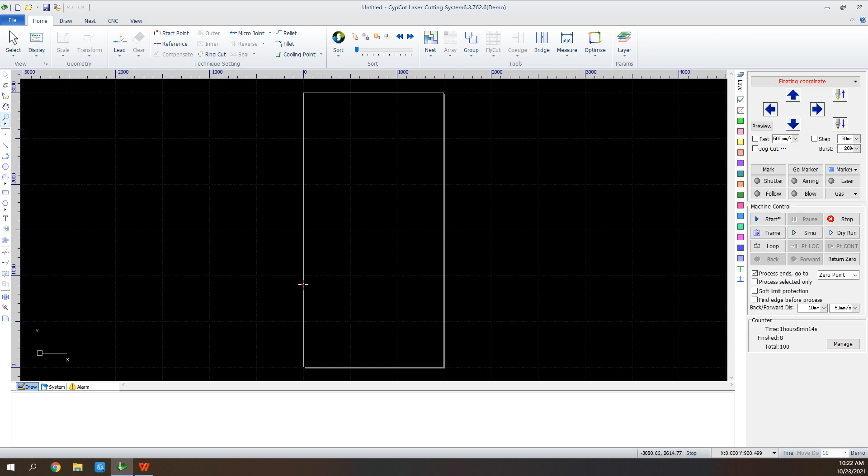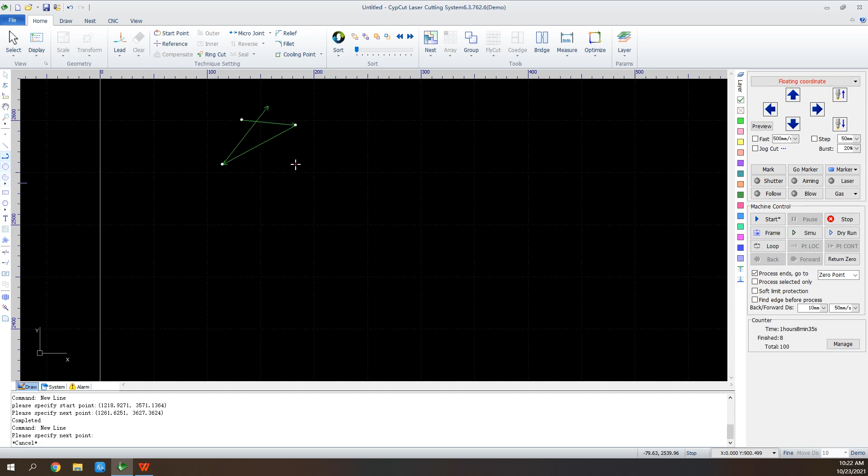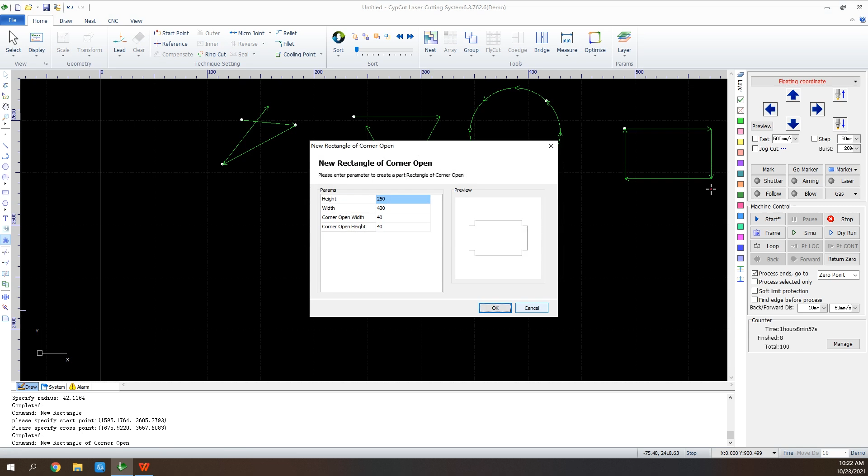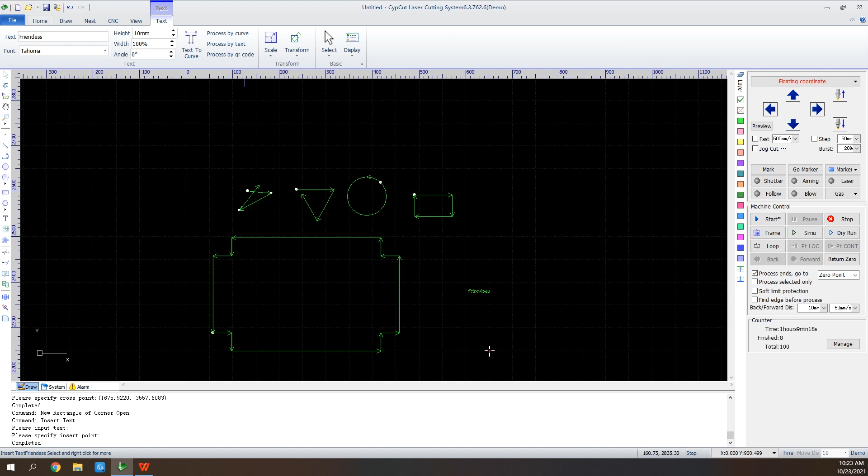We can draw lines, polylines, circles, rectangles, and we also have standard parts. And we can insert text here. If it's too small, we can make it bigger.

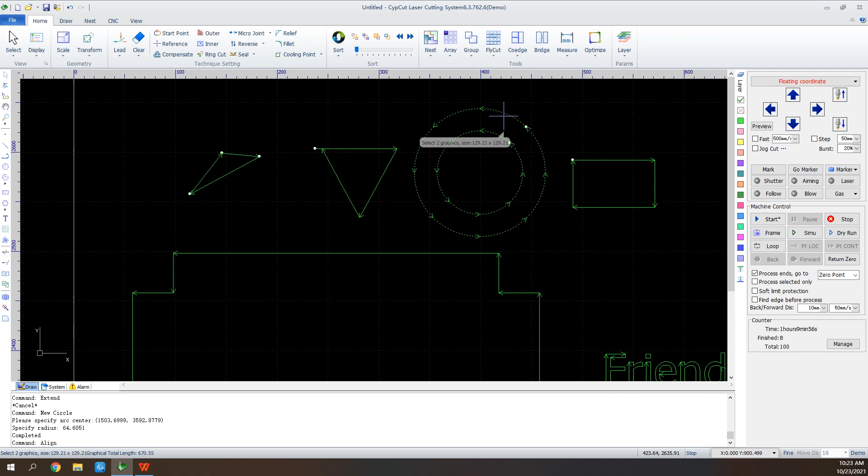And down below, we have trim, extend, and if we have 2 circles like this, we select them and click the center align. They will be center aligned.

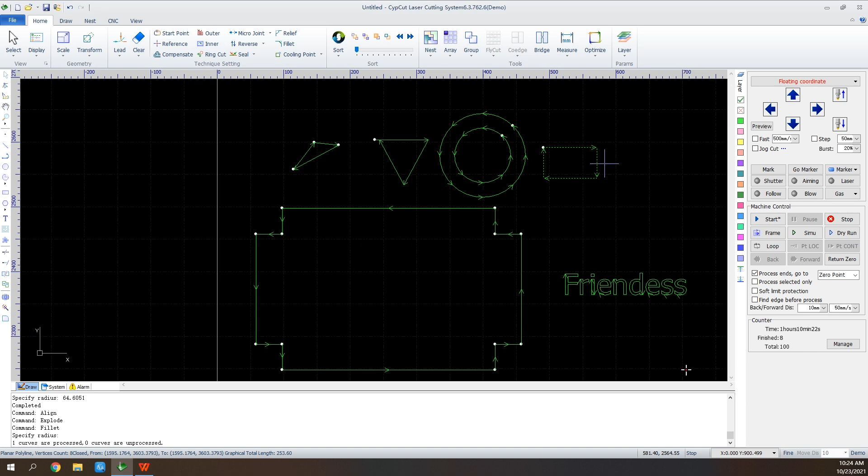When we explode a graphic, it will be turned into several lines. And we also have the fillet. Select the graphic and click the fillet. We will get round corners.

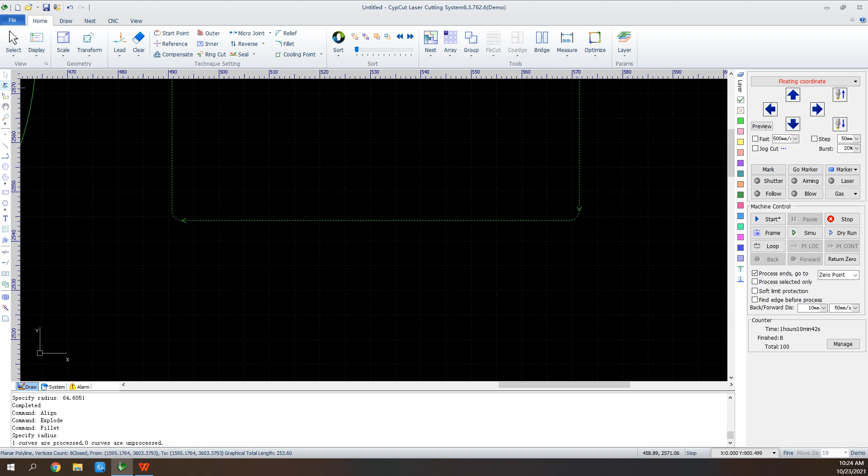The first 5 functions of this toolbar are selection, node editing, sequence editing, dragging, and zooming. Node editing is used for fine-tuning graphics. Select a graphic and click the icon.

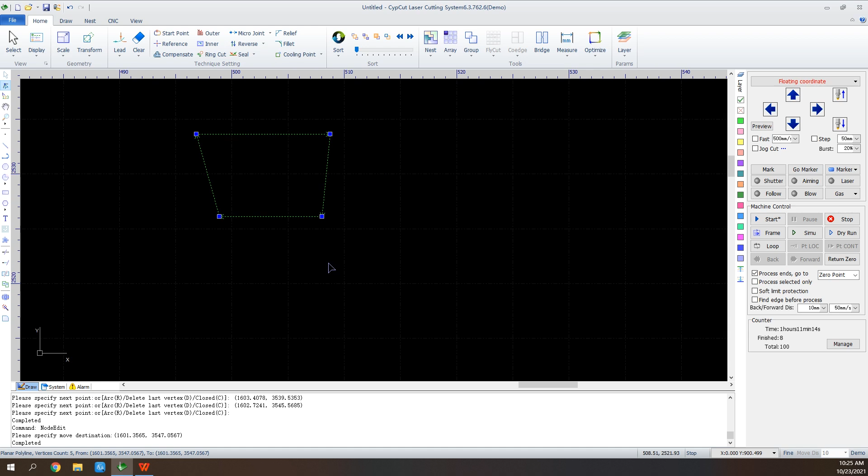For example, let's firstly draw some irregular graphic. Select the graphic, click the icon. We can see the nodes of the graphic. Drag the node to adjust the graphic.

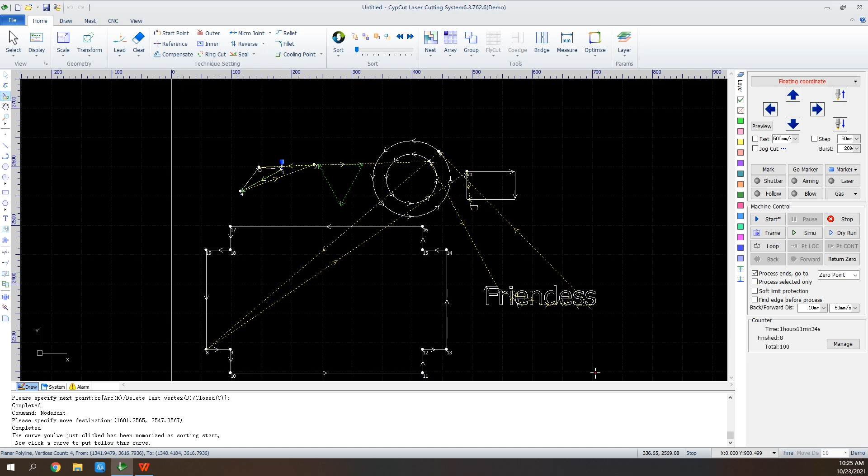And we can edit the cutting sequence manually. If unsatisfied with the default ones, it would be changed following the sequence we click.

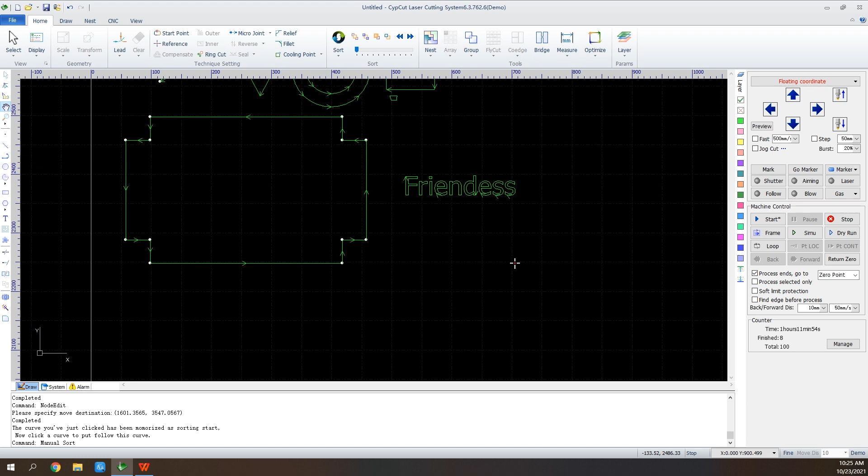As for the last 2, drag to translate the view or zoom in it as we want.

In this View module, click Select to get the drop-down menu. We use Quantity Modify to modify the graphics of the same size and layer. First, select a graphic. Then we click the icon, and we can give instructions in this interface.

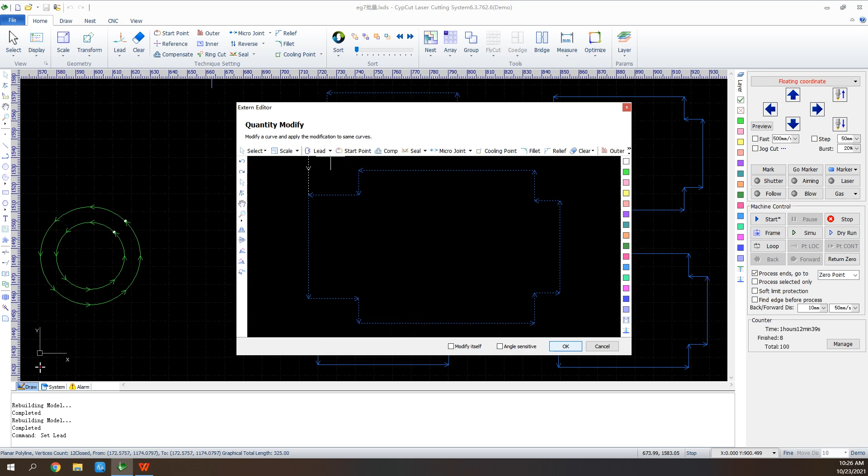For example, we set a lead. Click OK, and we will get 4 leads for each one of the 4 graphics.

There we also have Disable Fast Drag Copy. This is for avoiding misoperation on an input file. Now we cannot drag the graphic.

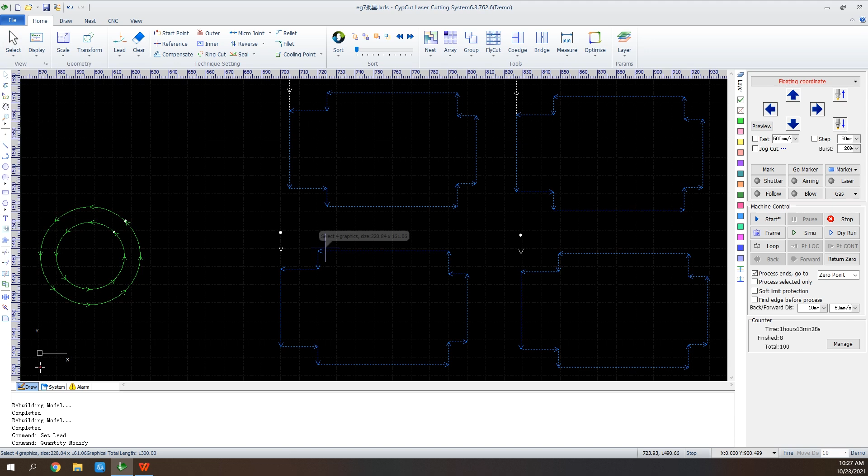Also, we can choose graphics by layers or by types. And we've got 2 ways of frame. Press and hold from left to right, a blue box will appear. Under this condition, only if a whole part was framed in the box will it be selected.

And if hold from right to left, there will be a green box. As long as part of the graphic was framed in the box, the whole will be selected.

And in the drop-down menu of Display, we have Display Open Figure in red. Let's draw an open figure. And we choose this. It will turn red, and we can quickly find it and modify it.

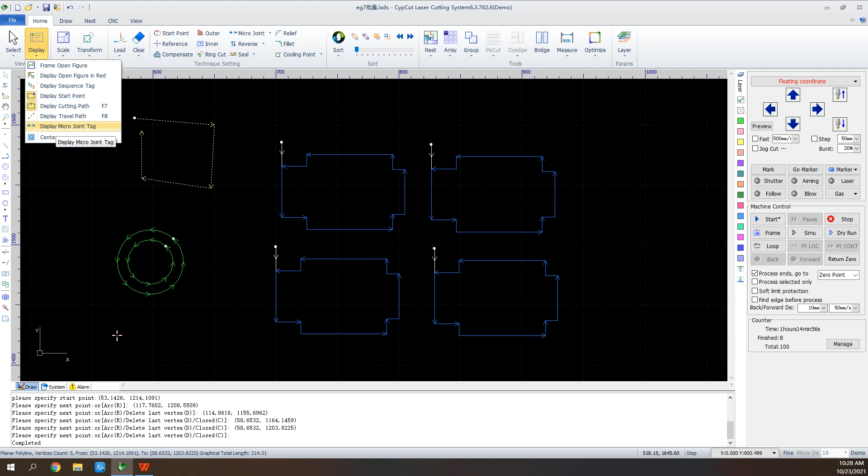And we also have Display Microjoint tag. This is for when there are too many microjoints and we may not remember. We click the function, and we can quickly find all the microjoints.

And let's draw something new. Select the graphic and click the scale to modify size. Now, as we can see, the ratio is locked. We need to get it unlocked first.

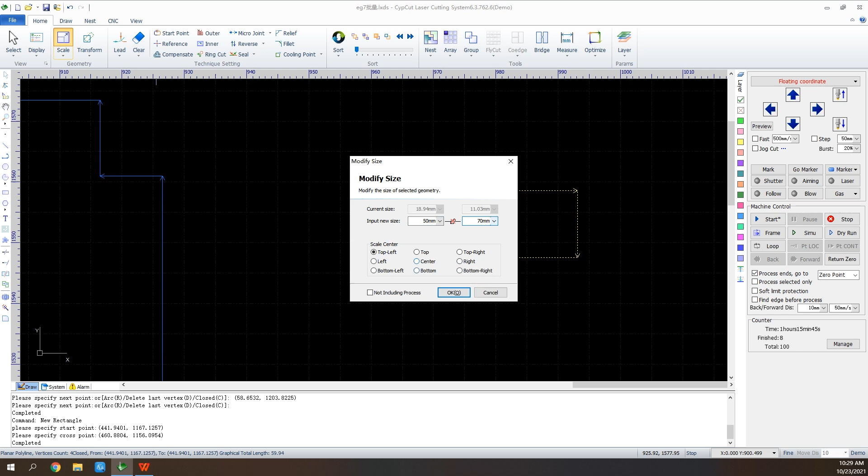Say we want a rectangle of 50 times 70. Input dimension here and we will get a new one. Quick modify the graphic size can be realized as well: 2 times bigger, half times smaller. And we can find ways in transform to translate, align,

flip or rotate the graphic. If we have graphics like this, we firstly select them and make it left align. Flip vertical, or we can rotate it.

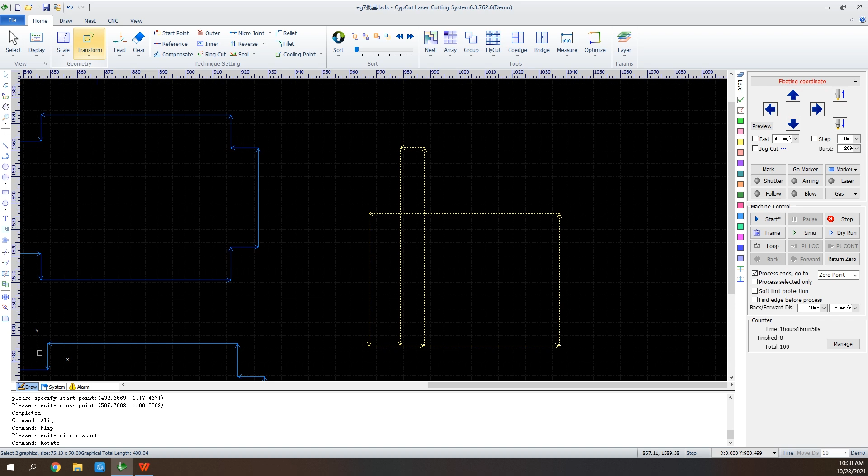And when we laser cut parts, we make the cutting path start from several millimeters away from the part. This way it could get cut much better. The distance is what we call the lead.

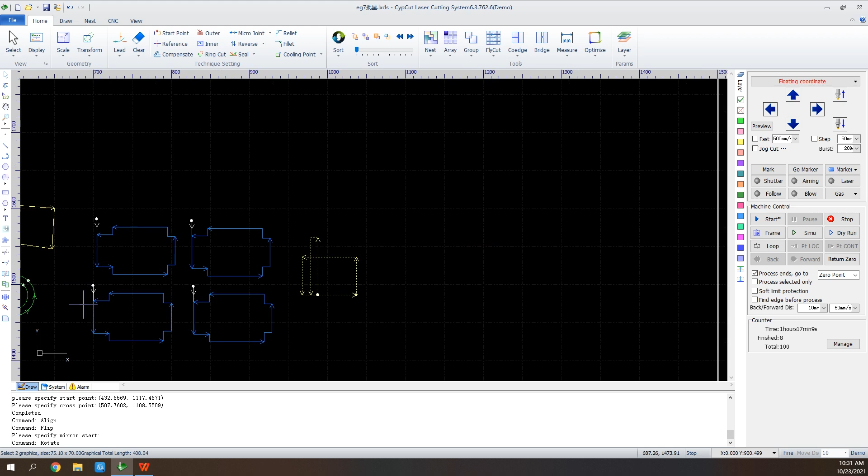When we set a lead, first we select the graphic, then click the lead to set the parameters. 3 lead types to be chosen: line, arc, line plus arc, and here we can set the length and angle.

If we need a small hole to remove slag when we are cutting stainless steel, check this box. As for lead position, we can choose to introduce from part tip or long edge. It's just according to our needs.

Generally, we recommend an angle of 0 degree for lead from part tip, but an angle of 90 for that from long edge to get a best performance. When we need to change lead type but remain the original position, check this box.

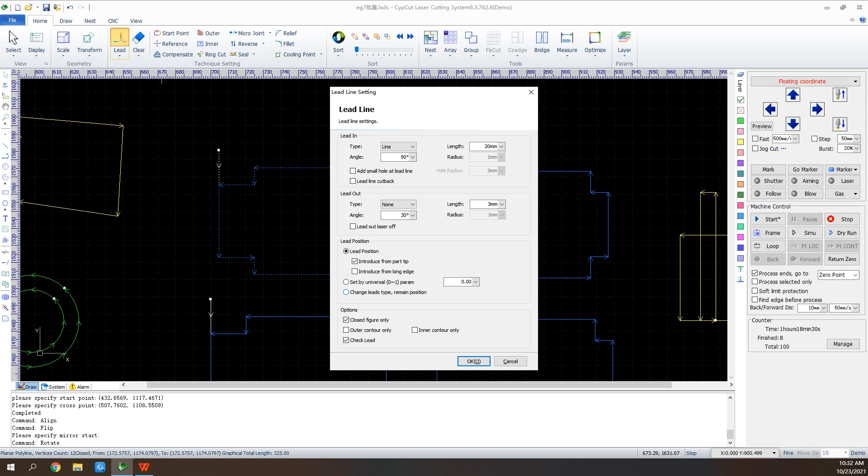And if we don't want a lead, just clear lead to delete it.

And we've also got a bunch of other functions here on the right, the technique setting. First, we have start point. When we feel like changing the start point that automatically generated, just click the icon. Then a small square will appear as the cursor moves on to the graphic, and we can change the position to wherever we want.

As for laser cutting, there exists a kerf width. We can use the compensation.

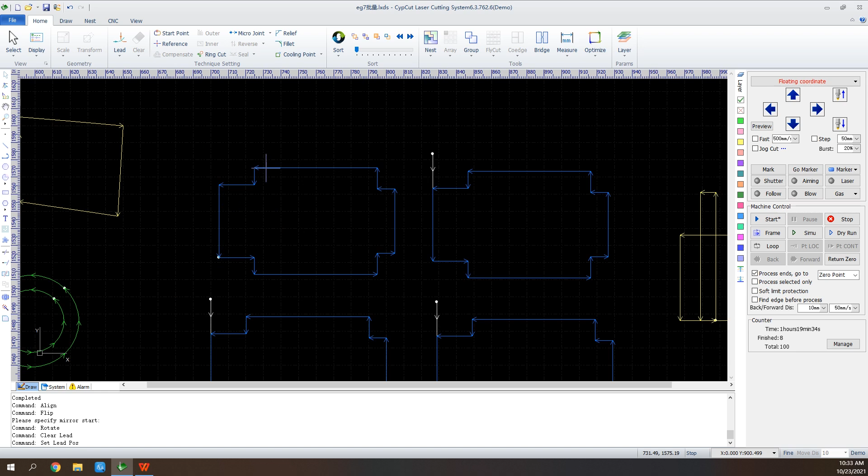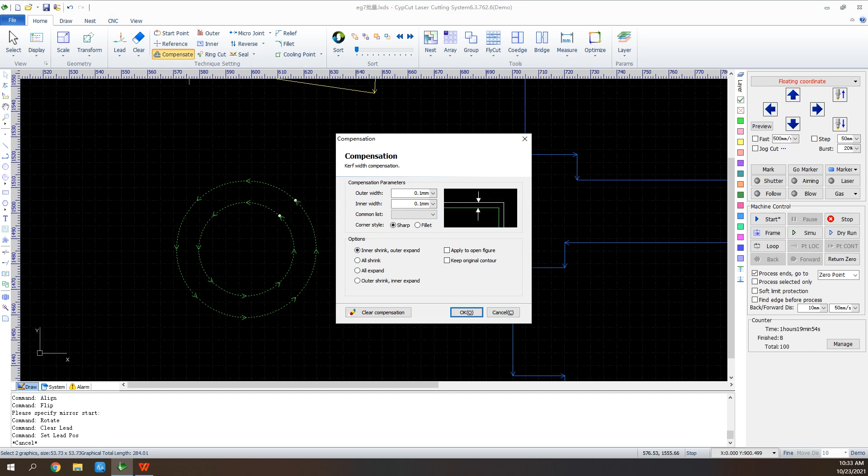And if it's a graphic like a ring, we check inner shrink and outer expand to make up for it. In this case, we can get parts cut more precisely and get the size we want. Now we get the compensation.

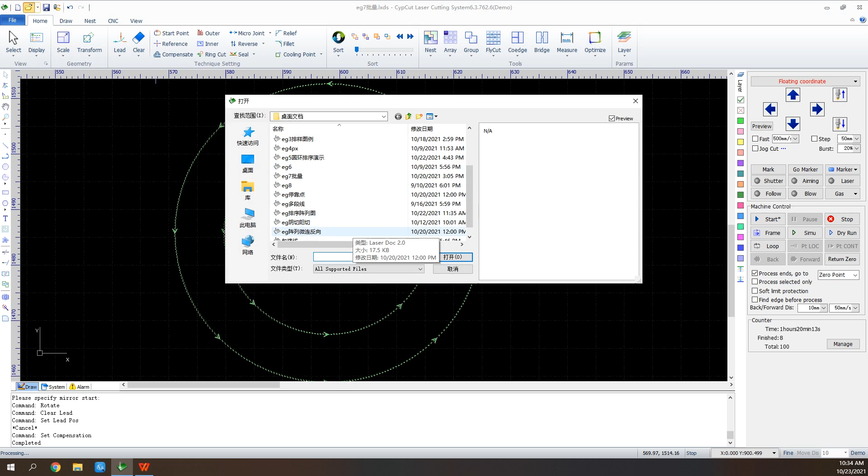When we cut co-edge graphics like this, inner and outer contour may get wrongly identified, say when we add leads. As we can see, the leads are invalid, so let's identify inner or outer contour. Now this is a normal part.

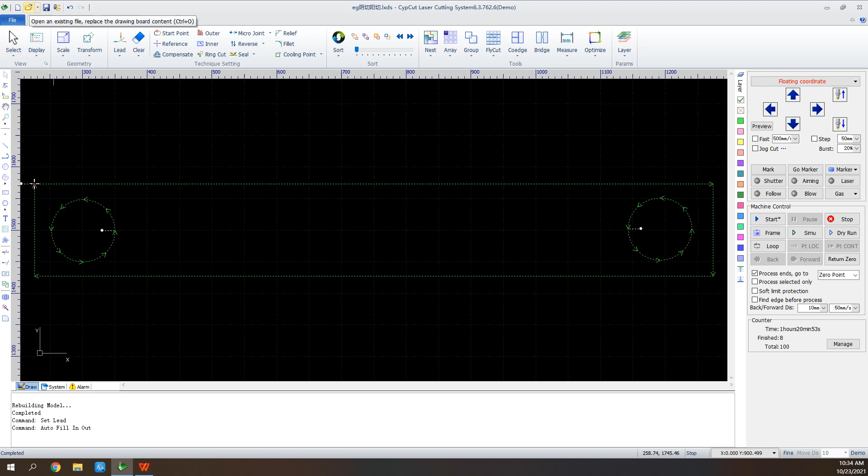Sometimes when we cut a long ribbon of sheet metal, it may get lifted during the cutting and hence get in the way of the cutting head. Therefore, we need to add micro joints to avoid this situation. Here we have a micro joint.

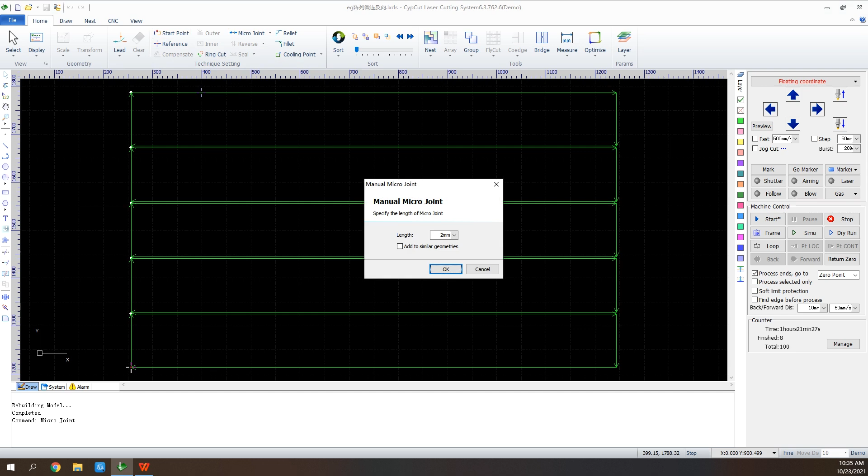We've got manual and automatic micro joints, two ways. Click the icon and add joints to where we want, or choose to automatically generate the micro joints. Press Shift on the keyboard and click the micro joints. We can clear them if we don't want it.

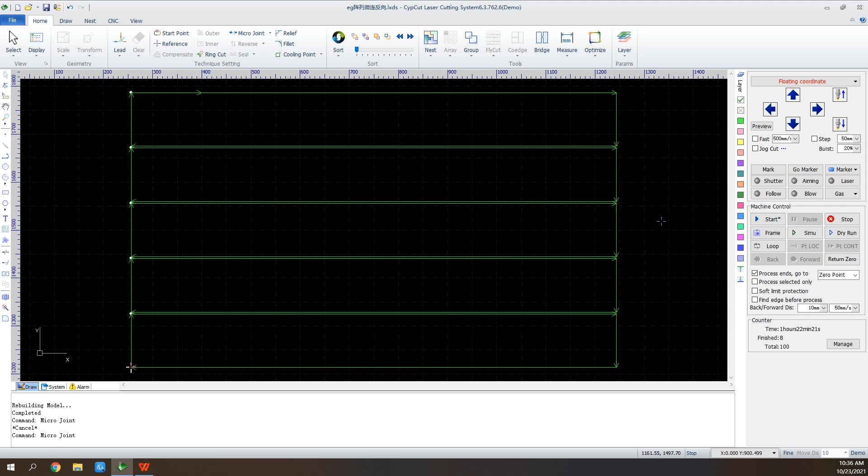Besides, as the default cutting path goes clockwise, when we come to the bottom line of the second oblong, the sheet will vibrate for lack of support.

To solve the problem, we use the feature reverse. We use the reverse to change the direction of the cutting path. So now, as the sheet gets better support, it will stay steady while being cut.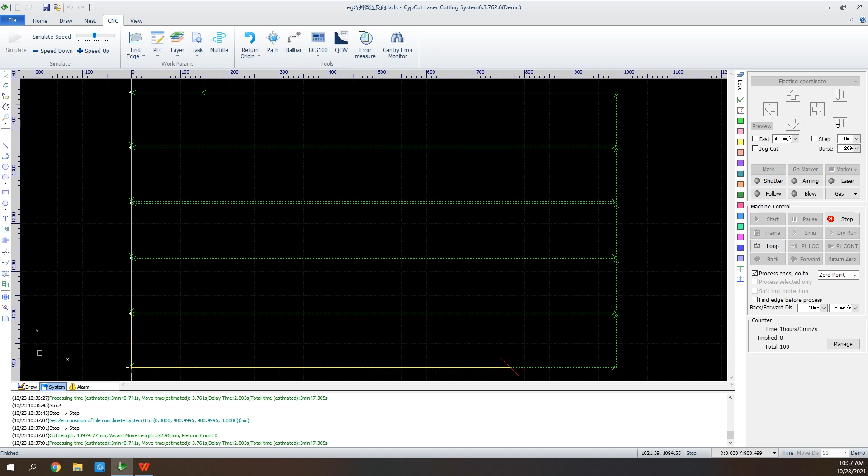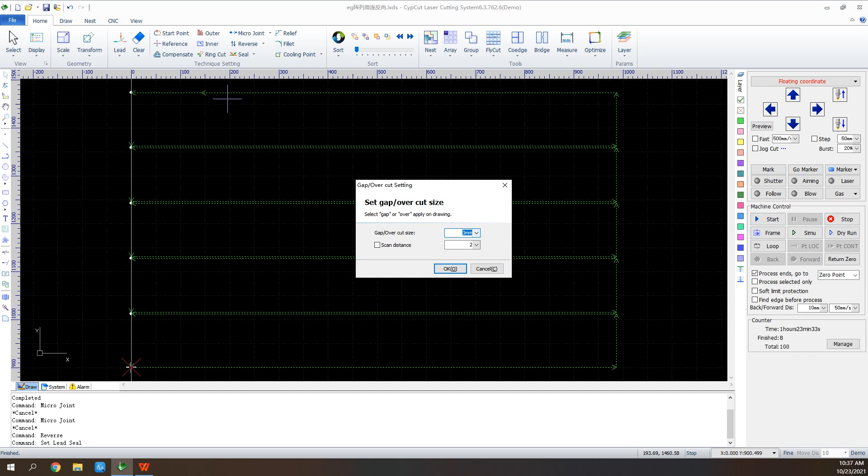Down below, this is the gap feature here. In the drop-down menu, we can see the gap. Select the graphic and click it when we need to set a gap at the end of the cutting path. Here is the gap. On the control rail, we can seal the gap if we don't want it anymore.

There are also overcut and multi-cut. Overcut is for making sure the whole part was machined, and multi-cut is for an obvious marking.

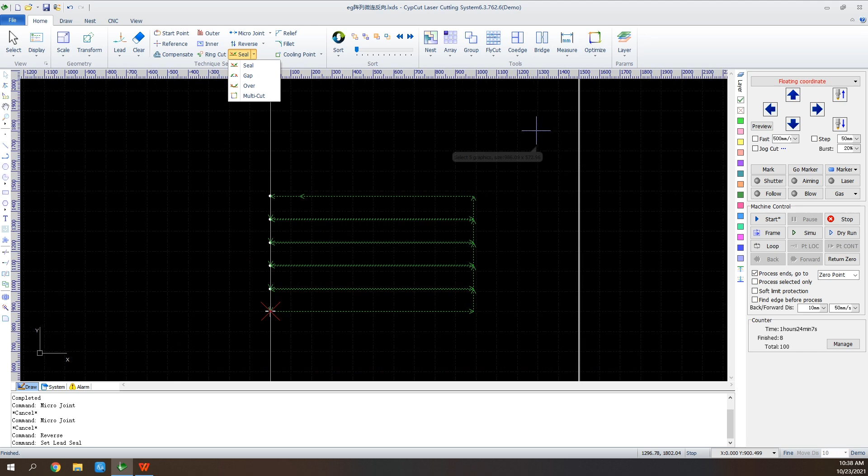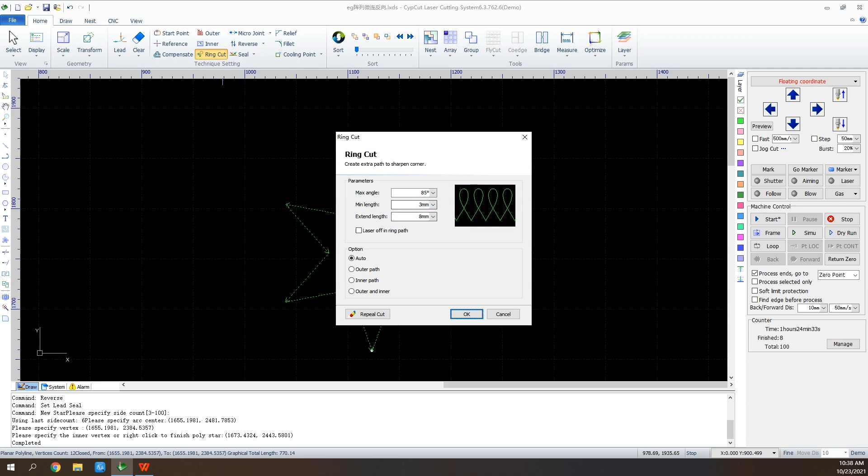Sometimes we need to cut graphics with sharp angles. To ensure a good performance, we use the feature ring cut. As always, we click to set parameters accordingly. Now we get the ring cut.

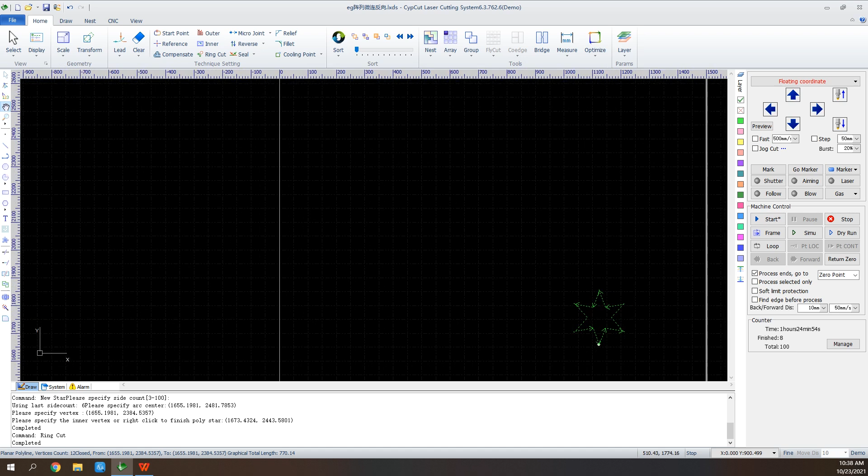And when it occurs to parts with a corner to be bent in the next step, like a standard part like this, we can set the relief angle here manually.

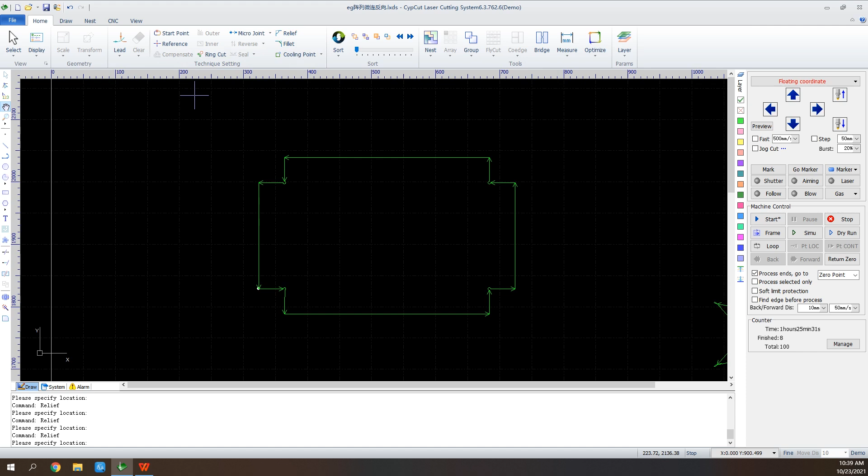And this fillet feature is different from the one at the bottom left. We can add fillet one by one according to needs.

When we cut thick plate, at the corner of a graphic or the lead-in, from the tip we need to get laser off to stop cutting and blow to cool the point in case the part gets melted. So we can use the cooling point feature.

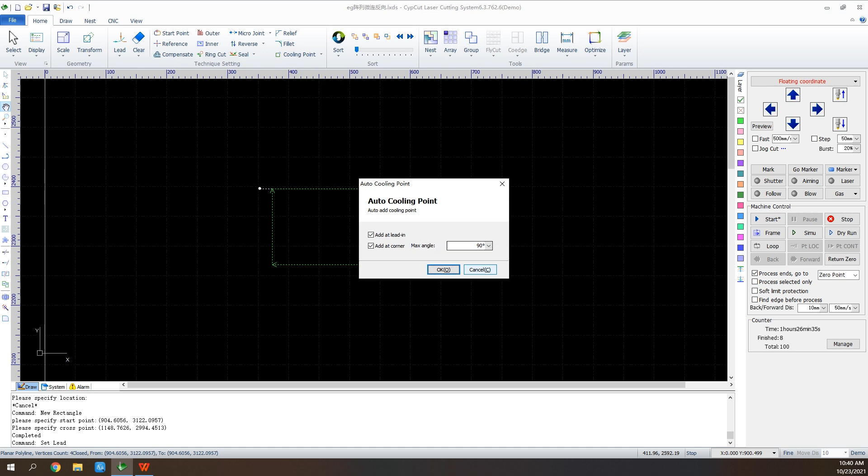We've got two ways: automatic cooling point and manual ones. Choose auto cooling point and we'll get every corner and the lead-in position a cooling point. And if we click this clear cooling point, all but the one at the lead-in can be cleared. This one needs to be cleared manually.

So we click the icon again, press Shift, and click to clear the point.

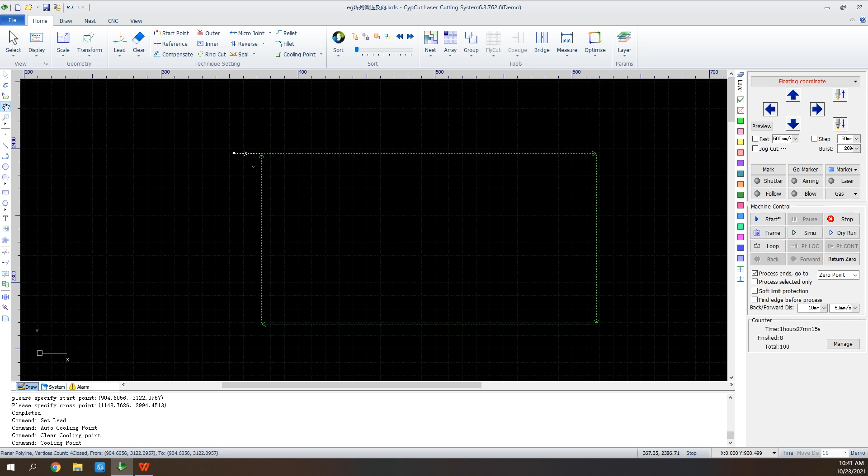And at the end, let's focus on the reference point. As we can see, on the machine panel, the red cross represents the position of the cutting head at the moment. The white cross is the mouse, and this one is the reference position.

The reference point means the position of part 0 in relation to that of the whole graphic. When we set the reference point at the bottom left, the graphics will show at the top right of the point, as we can see here. And in the floating coordinate mode, the cutting head and the part 0 position are at the same place, so the machine process starts at the top right.

If we set the reference point at the bottom right, the machine process starts at the top left of the point.

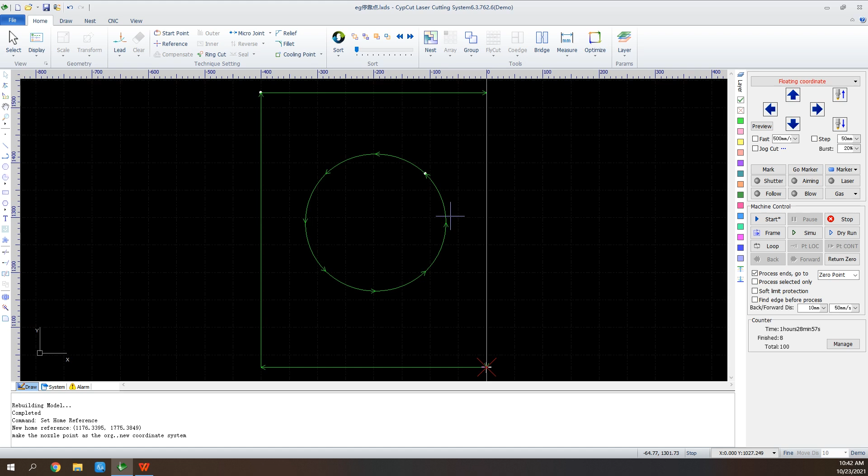There we've got exclude unprocessed layer. For example, there we have 2 graphics, and we now set the rectangle as not processed. We check this box, and the reference point will be at the bottom of the circle. It means it will start cutting from this circle instead of the rectangle.

And though we can manually set the reference point, relative zero reference is the common choice. The floating coordinate working with zero reference can realize a flexible production.

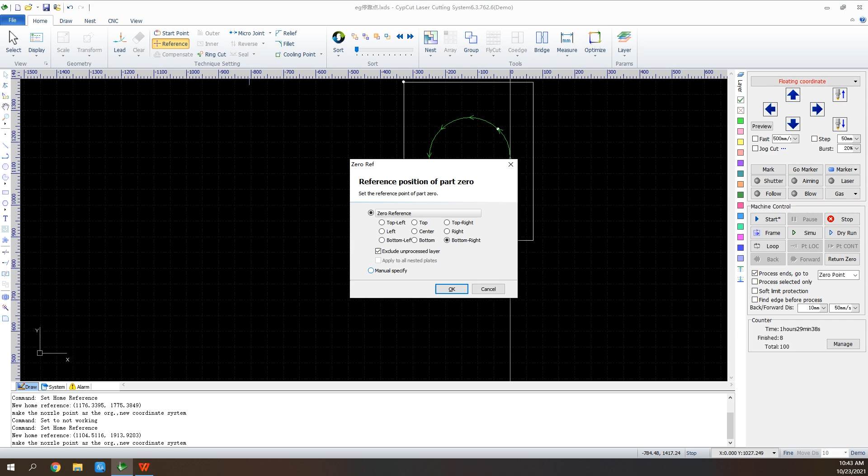So that's for today. We've learned the features in view, geometry, and the technique setting modules, and we know how to draw simple graphics. Remember to practice. See you next time.